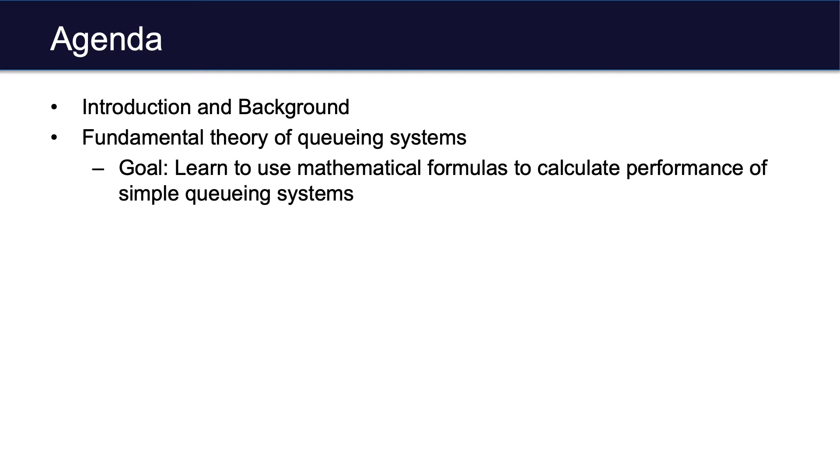Next, with the theoretical knowledge of queuing systems, we'll learn how to use a commercial professional simulation software called Simul8 to construct simulation models of those fundamental basic queuing systems. The goal is such that you can use the software to build, set up, run, and verify the simulation models of those systems by comparing the output of the simulation model and the metrics calculated using the formulas.

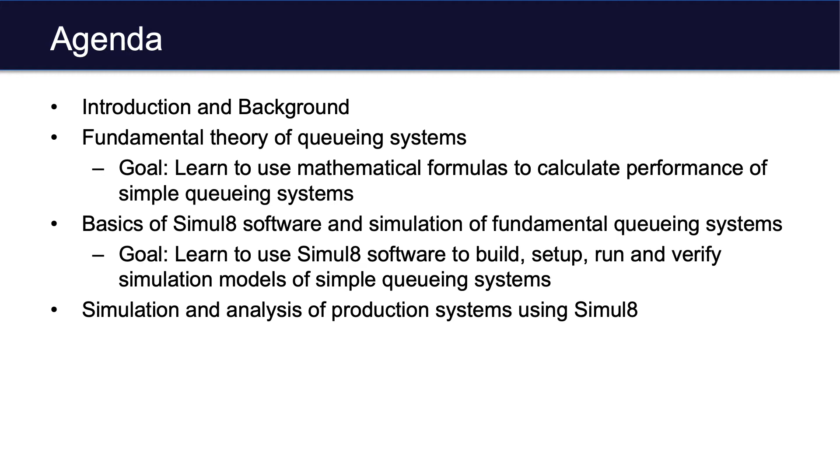After we're familiar with the simulation software, we'll go ahead and discuss how to use that particular software to analyze production systems. The goal again is to use this simulation software to build, set up, and run the production system models and analyze the output data.

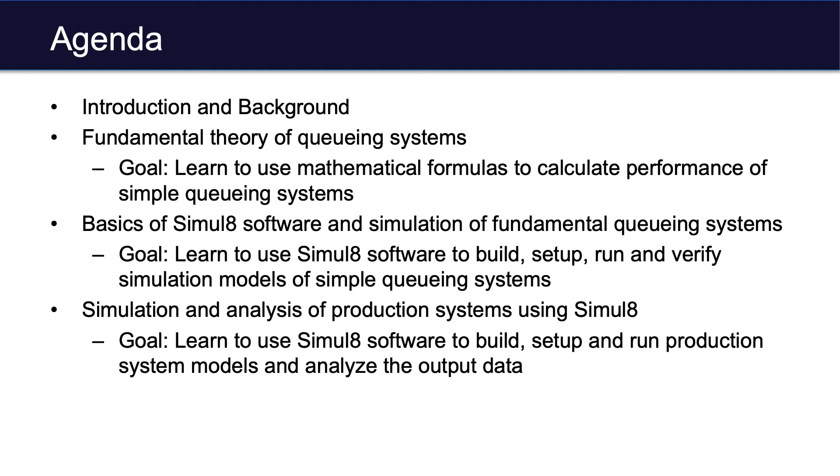Now, since this module is on manufacturing systems, we'll start by discussing the six general ideas or general areas of manufacturing. Of course, this is only one way to categorize the entire field of manufacturing. In our view, we first start with materials and products. These two things compose the basic fundamental components in manufacturing processes.

In the past few modules, you have learned material and knowledge and tools related to analyzing various properties and phenomena related to materials and products. Machine tools and material handling devices are the components that will handle and process the materials and products and eventually make them into final goods.

As soon as we figured out the process to make those products, we'll have to arrange the set of machines, equipment, material handling devices, usually viewed as buffers, as well as human laborers around them, so that the desired products can be produced in the most efficient and effective manner. This is what we call production systems.

At a higher level, to deal with various demands from the market and from the downstream customers, we also have to plan and schedule the production activities. This is the fourth area, and the main problem here is to optimize various activities along with the consideration of time, cost, quality, and so on.

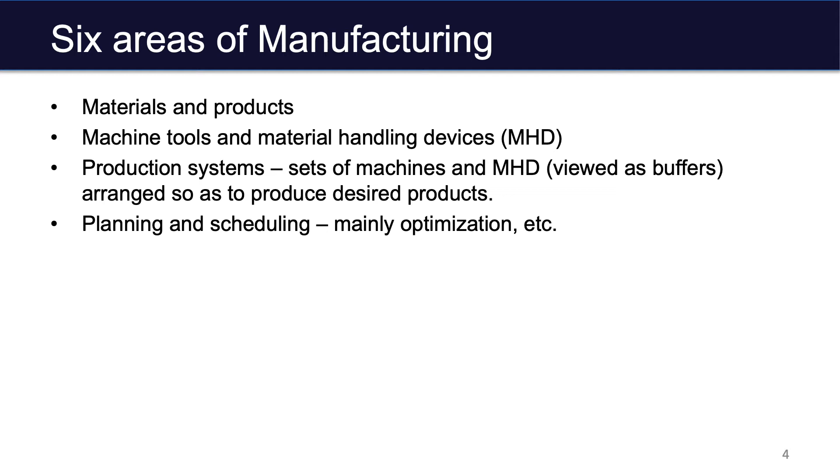Mentioning quality, the assurance of quality is a major problem in the entire manufacturing systems research and practice. The main tool here is called Statistical Process Control, SPC, and there are various mathematical tools, qualitative tools, and graphical tools developed in this area.

And finally, the sixth area is what we call work systems. The goal is to look at how to train and pay workers and operators so that they optimize the system and enterprise performance through their own interest.

Now, this particular lecture focuses on the third area, production systems. In other words, we've figured out the set of machines and material handling devices, and we know how to deal with the material and products. Now we will put them into a system and analyze the performance as a system.

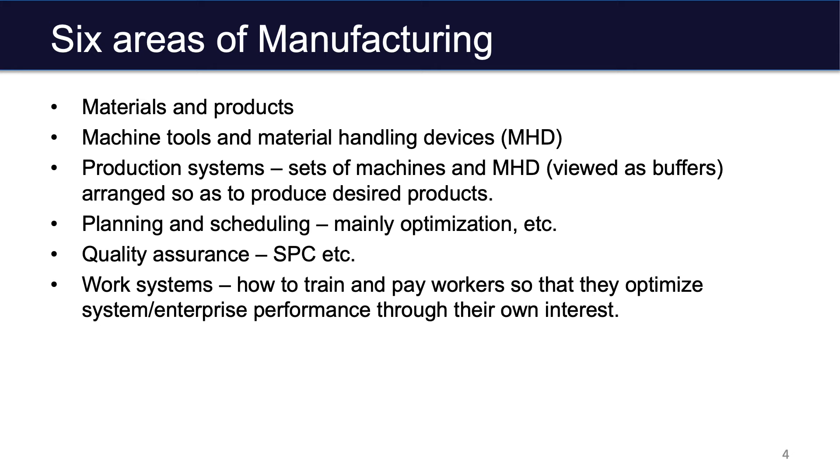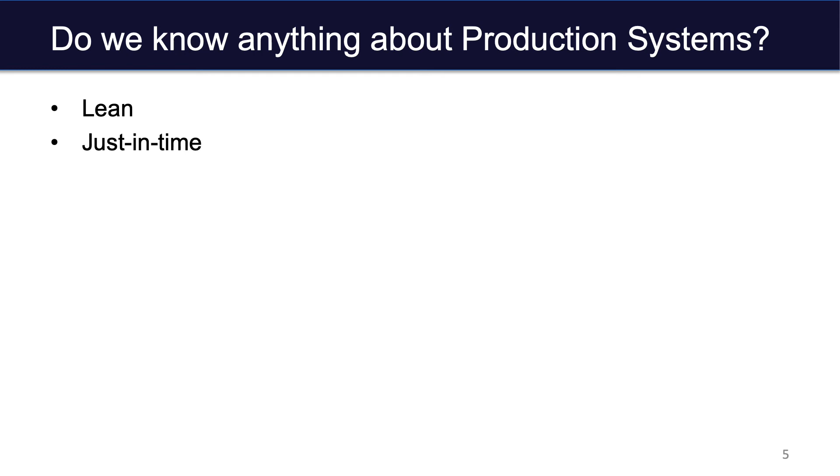Production systems is not a new field. It has been analyzed or studied extensively for several decades, and there are various tools developed. For instance, people talk about lean manufacturing, just in time from Toyota, and overall the Toyota Production System, TPS. People talk about Six Sigma, theory of constraints, push production, pull production, and so on and so forth.

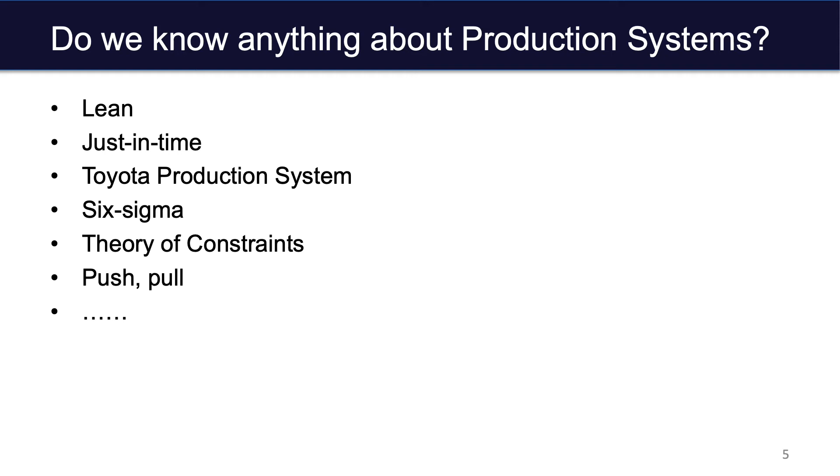There are various terminologies introduced in various categories, fields, directions, or branches of study. But what they are - I took some definitions from Wikipedia to help us understand. For instance, lean manufacturing is defined as a production practice that considers expenditure of resources for any goal other than creation of value for the end customer as wasteful. The goal of lean manufacturing is to reduce waste, which can be in different areas: waiting time, idling of machines, time spent searching for a particular tool, transportation from one spot to another in the facility, and so on.

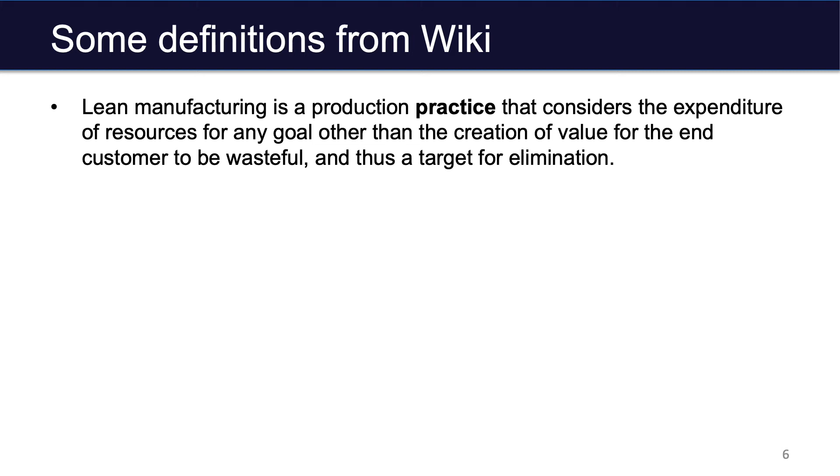Just in time is a production strategy that strives to improve business return on investment by reducing in-process inventory and associated carrying cost. It's relevant to lean manufacturing, and just in time means we want to reduce waste, in this case time.

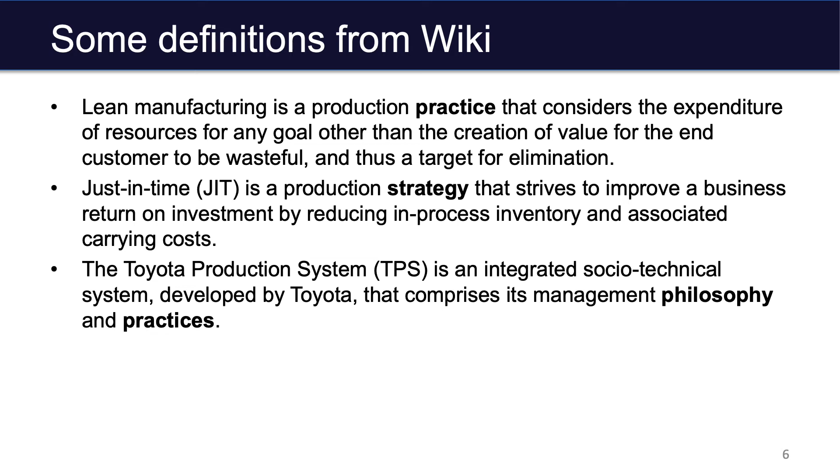In TPS, Toyota Production System is an integrated socio-technical system developed in Toyota that comprises management philosophy and practices. And finally, Six Sigma is a business management strategy. It was first developed by Motorola in the 80s.

In this slide, I've highlighted or put those words in bold to emphasize what I'm trying to say here. So if you look at these tools, Lean, Just-in-Time, TPS, and Six Sigma, they are practice, strategy, philosophy. And these words can help us in a qualitative manner to improve the manufacturing process overall. However, we do need more quantitative tools, more rigorously defined engineering tools to push the boundary.

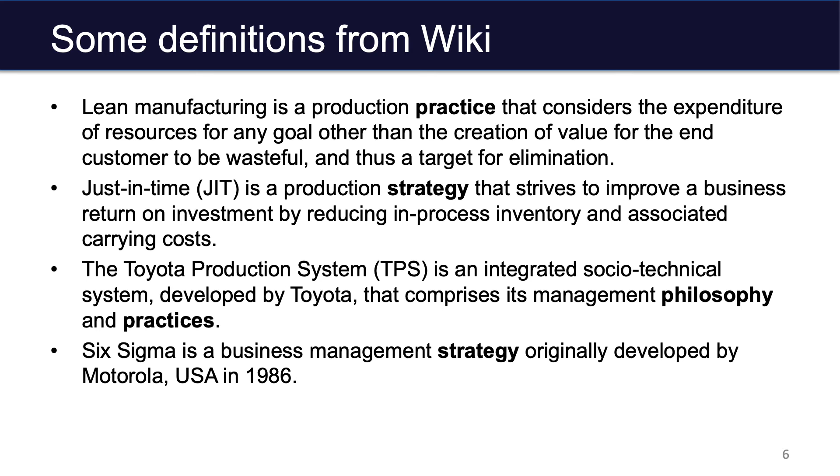Now, theory of constraints is also a popular tool in manufacturing practice. It's an overall management philosophy introduced in one of the best-selling books, The Goal, which is geared to help organizations continuously achieve their goals. As we can see from this picture, it's sold over 3 million copies, and almost every manager on the factory floor owns this book, and it's also being used as one of the textbooks in a lot of business schools in this area.

But again, this book is mostly focused on intuitive and common sense tools, or methods that can help improve the manufacturing process, but not to the level of rigor that typical engineering would require. The goal of this module is to provide you such quantitative tools through what we call computer simulation of production systems.

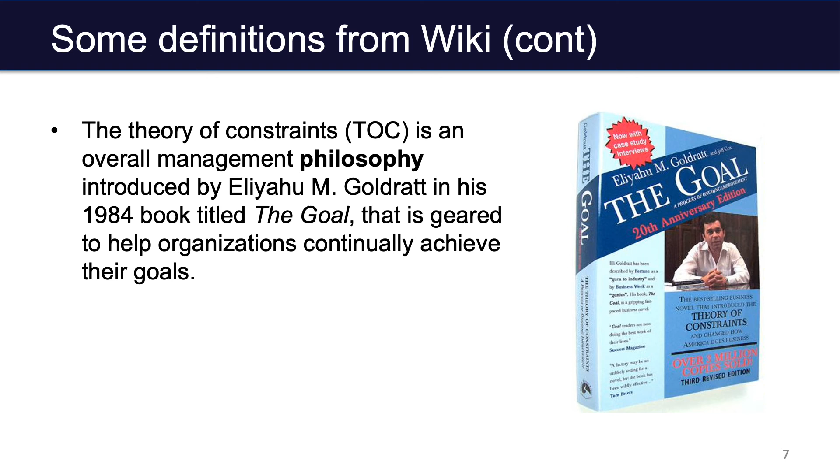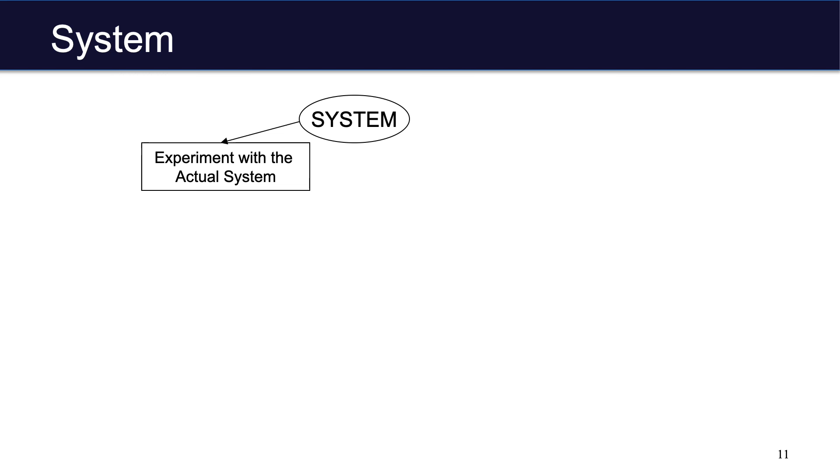Now, when we look at overall systems, no matter if it's a production system or any other system, the investigation can usually be done in two ways. First, we can experiment with the actual system, but this can become costly, disruptive, and may not be appropriate for certain scenarios or applications. So if that's the case, we sometimes can experiment with the model of the system. But there's always a question of whether or not the model you created can actually reflect the nature of the system, or the essential nature of the system you're focusing on.

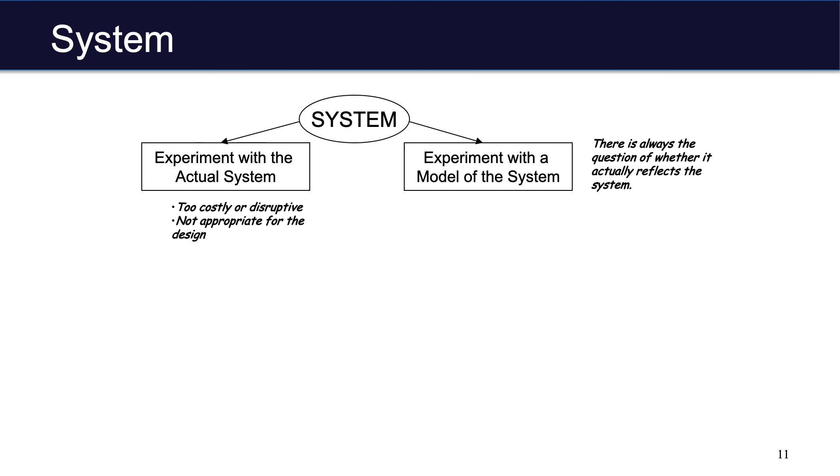In terms of the model, there are two different types of models we can work with. One is a physical model, meaning you can build a tabletop scaled model of the actual system. It can be, for instance, 1 to 24 or 1 to 1000. A smaller scale physical model can sometimes help you understand some of the basic features of the actual system, and you can do the simulation based on the actual tabletop model or scaled down model.

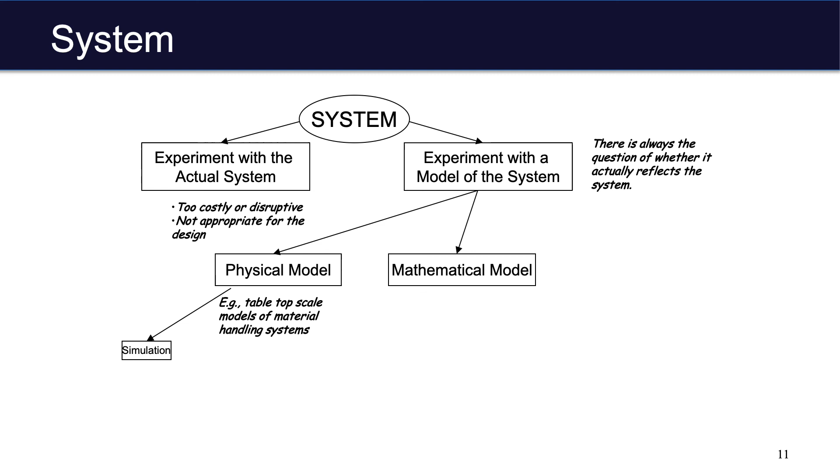The other type of model is the mathematical model. Of course, that means you will have a set of mathematical equations and formulas, and the intrinsic interactions of the components in the system are characterized by those equations and formulas. And when you do that, you have to make a bunch of assumptions that will take the form of mathematical or logical relationships. Whether or not those assumptions are valid is a critical problem to solve when we build a mathematical model of a system.

And when we have the mathematical model at hand, there are two approaches to study this mathematical model. One is to rely on the mathematics and derive analytical solutions. If the model is simple enough, we can apply our mathematical tools like calculus, algebra, probability theory, and statistics to derive those equations or solutions. But this may not always be the case. When the system becomes more complex, we have to use computers, and particularly we can use simulations to help us mimic the actual operation of the system through the mathematical model.